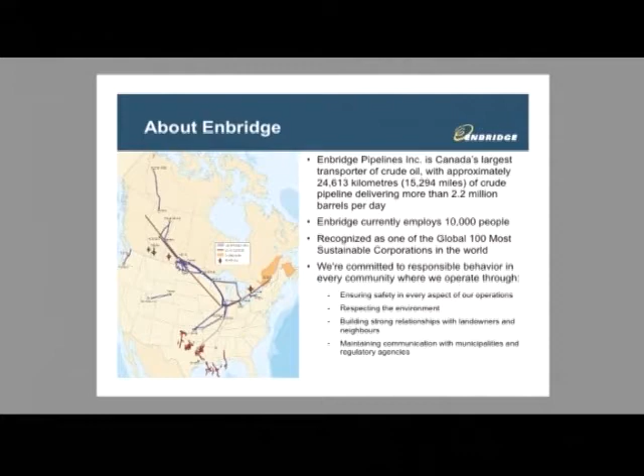We have been recognized as one of the world's most sustainable companies by Corporate Knights. We've had that distinction for several years in a row. We're very proud of it. It's a difficult thing to achieve. We are also committed, and I think this is the most important part of this evening. We are committed to being a responsible corporation in all the communities where we operate. We are committed to the safety of our employees, to the safety of the public, and to protection of the environment. These are critical issues for Enbridge. They are job number one at Enbridge.

Secondly, we are committed to building relationships with the stakeholders who are interested in what we do. So we deal with many levels of government, federal, provincial, municipal. We deal with landowner associations. We deal with individual landowners because our pipeline crosses many privately owned properties. So these relationships are very important. And finally, we believe in transparency. We believe in sharing information. So again, to use this evening as an example, we're very happy to share information about the work that we're proposing to undertake here in Ontario.

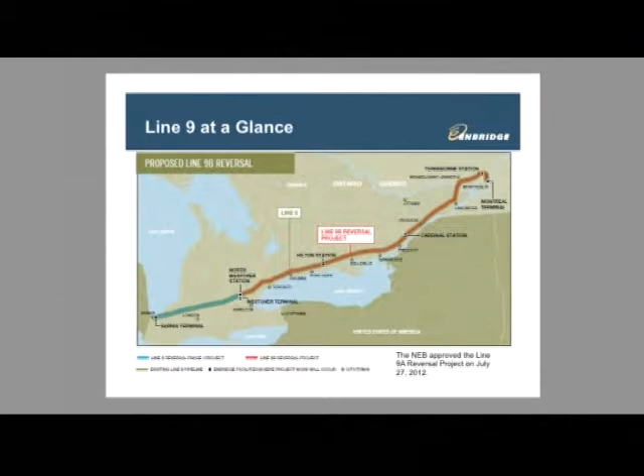There we go. So this perhaps gives you a little bit of a better image of Line 9. And you can see that it extends again from Sarnia to Montreal. And you can see some of the localities, some of the communities through which the pipeline runs. One of the things I will note is that this pipeline, in fact, does run through the City of Toronto and has been in the hydro corridor there for quite some time now. So, thank you.

So a little bit of background about Line 9. I've mentioned it's been around for a while. It's a 30-inch diameter pipeline. It's 831 kilometers long from Sarnia to Montreal. It has an approximate capacity of 240,000 barrels per day. It originally entered into service in 1976. It was actually constructed between 1974 and the end of 1975.

It was built in a west to east flow. So when the line was first put into service, it actually ran from west to east, which is the direction we're now saying to reverse back to. So the comment, a re-reversal, would apply to the pipeline. It was built at the request of the federal government, who was dealing with energy scarcity, some concerns about foreign oil supplies during the decade of the 1970s, the oil embargo, if you will.

In around the mid 1990s, offshore oil production became very affordable because there were many countries in the world who began to export large quantities of oil. Refineries located in eastern Canada, because of their proximity to salt water, realized that they could save money if they were to start buying foreign-sourced oil. So in the 1990s, Enbridge applied to the National Energy Board to reverse the pipeline so that it started to flow from Montreal towards Sarnia.

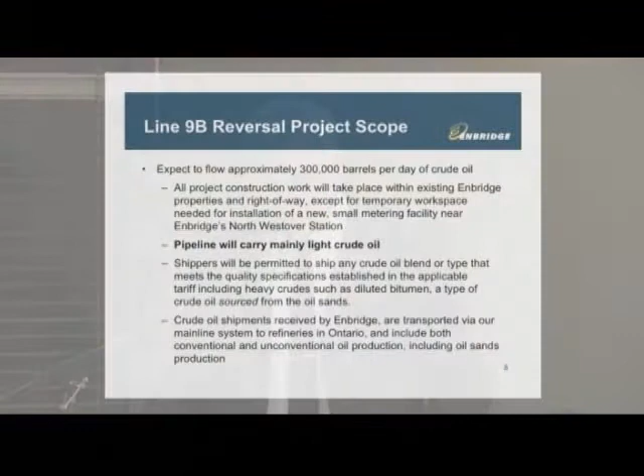The scope of the project. What is it that we're going to do? We are going to increase the flow of this pipeline, which currently sits at 240,000 barrels, to 300,000 barrels per day. Because this is an existing pipeline, it's a pretty straightforward project for Enbridge from an engineering point of view. This is not a complicated process for us to undertake.

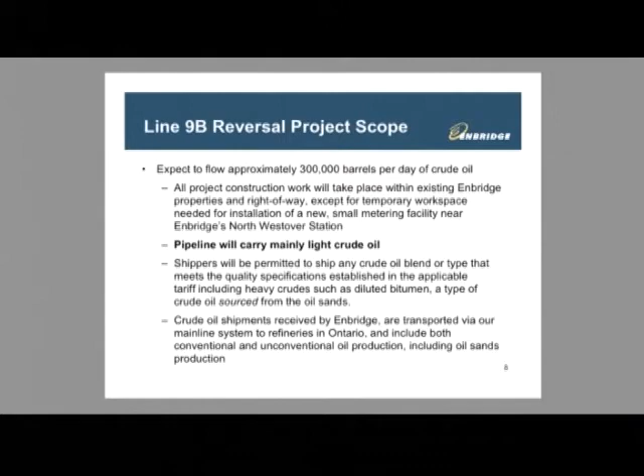All of the work required will take place within our existing facilities. So by that I mean the terminal we have in Sarnia, the terminal facility we have in Westover, the terminal facility we have in Montreal. We also have a series of pump stations along the pipeline which pushes the oil. There will be work that will be undertaken at those facilities too. But we don't need to purchase or acquire any new property. We don't need to expand our footprint in order for this project to be undertaken.

We will be shipping primarily light crude. And this perhaps is something you haven't seen so much in the newspaper. But our customers have requested us to send them light crude, not oil sands-based diluted bitumen, at least not in quantity. They are currently equipped in Eastern Canada to handle light crude. That's what the refineries were designed for. So they've asked us to send them light crude, except this light crude comes from Western Canada as opposed to offshore places such as North Africa and the North Sea and South America and the Middle East.

This is nothing new to Enbridge. We ship a wide variety of crude slates on our pipelines, and we've been doing it across the continent for 60 years. So shipping light, shipping heavy, shipping diluted bitumen is not new. It's something that we have a lot of experience doing.

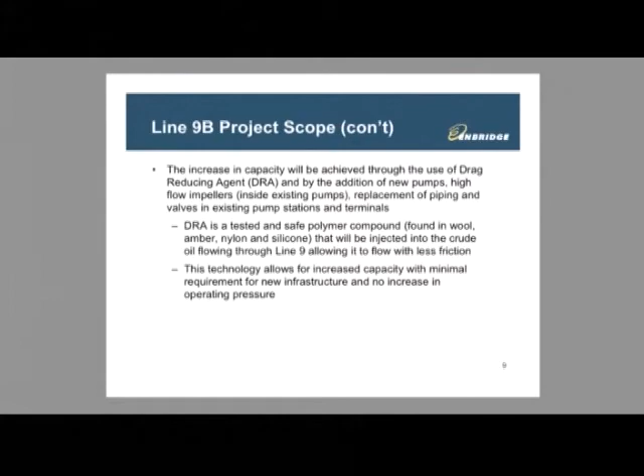How will we get from 240 to 300,000 barrels a day? We will introduce a polymer agent which is referred to as a drag-reducing compound, or DRA, drag-reducing agent. It's basically liquid polymer. We inject it into the pipeline, it coats the inside wall of the pipeline and reduces the friction of the oil as it travels down the pipe. It's hard to imagine that oil, which is slippery by nature, would actually have friction, but it does. And by the introduction of this material, we can actually increase the volume that we can put through the line in a day by 60,000 barrels without having to increase the diameter of the pipe or any pressure operating on the pipeline.

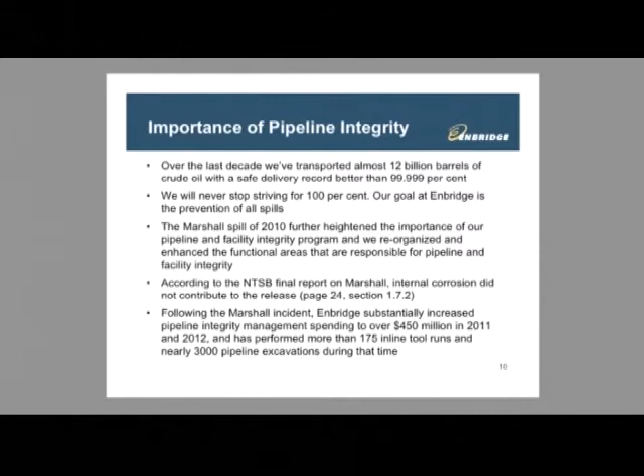Pipeline integrity, security, keeping the product in the pipe. It's important. It's important probably to Enbridge more than anyone else. Over the last decade, we've transported about 12 billion barrels of oil, and we've done that safely. Our performance rate is better than 99.999%. That's pretty good, but it's not perfect.

Enbridge strives to eliminate every spill. No spill is acceptable to Enbridge, and we take that commitment very seriously. We had a spill in Marshall, Michigan in 2010, and it was a serious spill by anybody's definition. We took it very, very heart to heart, and we responded to the best of our ability. We have done a lot since the Marshall incident to ensure that we never have to deal with something like that again. And our team tonight can provide you with many examples of those improvements because they've happened across the board at our company.

We've started with a new emphasis on safety culture, which applies to every employee, new, old, doesn't matter. We've introduced 6 life-saving rules, which are things that Enbridge employees must do. Failure to comply with the 6 life-saving rules means you no longer work for Enbridge. The commitment that the senior executive committee have made to improving our safety performance has really kind of impressed me. Because one of the things, as you'll see in some of my slides, is they have poured resources into these issues.

One of the things of note, again, to address something that's been widely publicized, is the fact that if we were to transport heavier crude oil or diluted bitumen, that material would pose a greater risk to the pipeline because of corrosiveness. Simply put, this isn't true. The Marshall incident was not caused by internal corrosion on our pipeline. It was not caused because of the product that was being transported in the pipeline. And that was borne out by the investigators' report, the National Transportation Safety Board in the United States. And I've cited the page number in their report if you want to see it. It's all available on the web.

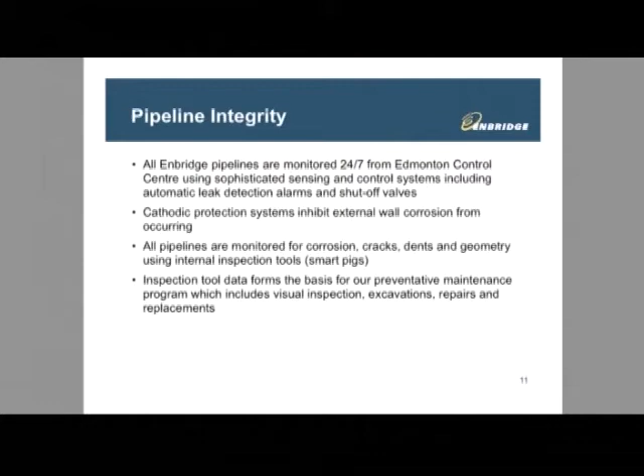All of our pipelines are monitored using the internal inspection tools, which I've mentioned. Those tools look for specific anomalies, or defects, if you will, in the pipeline. They look for corrosion. They look for cracks, dents, geometry issues where the pipe might not be round because of pressure that's been applied to it. The tool data that we collect from the tool runs forms the basis for our integrity management investigative dig program. We find something on our pipeline. The next step is to go to that location, excavate the pipeline, and visually inspect it to see what we're dealing with and determine what kind of repair is required.

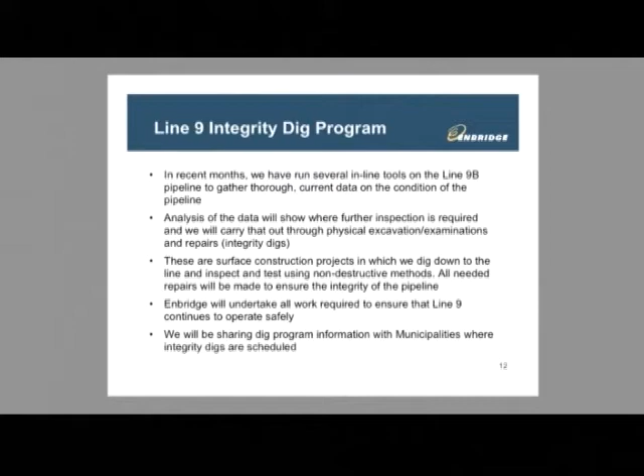This analysis will tell us where we need to go, physically excavate, dig up the line, and conduct repairs, or at least visually check to see if the pipeline tool is accurate. It's found something at the right milepost on our pipe. We go to confirm the tool data, and then we take action to repair, replace sections of the pipeline as required. So these projects are excavation. You'll see heavy equipment on the pipeline route, crews out working, people with shovels, because as you get close to the pipeline, our standards say you have to do your final excavation by hand to ensure you don't hit the pipeline.

All of this work that needs to be done will happen on Line 9B before the reversal goes into service. So before 2014, we're thinking maybe the beginning of the second quarter, all of the work we need to do will be completed.

We will also be taking measures to share this information with the communities that are impacted by it. As I've mentioned, we identify where we need to do a dig. So what we're going to do is we're going to communicate that information to the municipality, to the planning department with the city, to the conservation authority responsible for that property ahead of time, so they know what we're doing as well. They can see where we'll be, hopefully when we'll be there, and we can try to accommodate other people who have interests in those pieces of property.

Certainly when you're dealing with private landowners and you're asking them to allow you to come onto their property to undertake this kind of work, it's very important that you accommodate their interests. Many of them are agriculturalists, as you can imagine.

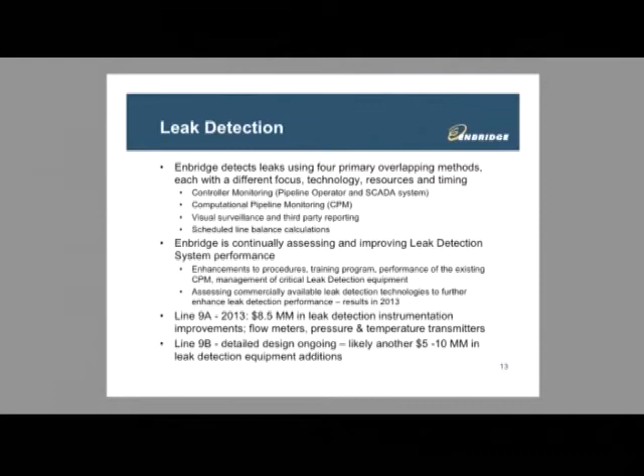We use controller monitoring, which is a pipeline operator and SCADA system. We use computational pipeline monitoring, or CPM. We use visual surveillance and third-party reporting, and we also use scheduled line balance calculations. Now, to me, I'm not quite sure what those terms mean, but I know that they're all intended to determining if, where, and how we might have a leak on our system.

Enbridge is always looking for ways to improve our leak detection system. We've made enhancements to the procedures, to our training programs, to the performance of our CPM, to the management of critical detection equipment. We are assessing commercially available leak technology, new leak detection technologies, to make further improvements to our system. And we're waiting for some results on some fairly exciting new tools that are being developed later this year.

On Line 9A, between Sarnia and Westover, we've spent $8.5 million on leak detection instrumentation, improvements, new flow meters, pressure and temperature transmitters. On Line 9B, there's ongoing detailed design as part of the reversal project that's underway. We plan to spend another $5 to $10 million on leak detection equipment on Line 9B.

The environment. It's critical, and we know that, and we have a responsibility to protect it. And obviously, as you can imagine, the people in Marshall, Michigan in 2010 made that point very clear to us, and we felt for the impact that we had on those people. We took it hard. It was a blow for Enbridge, and we've tried very hard to improve where we found opportunities to do that.

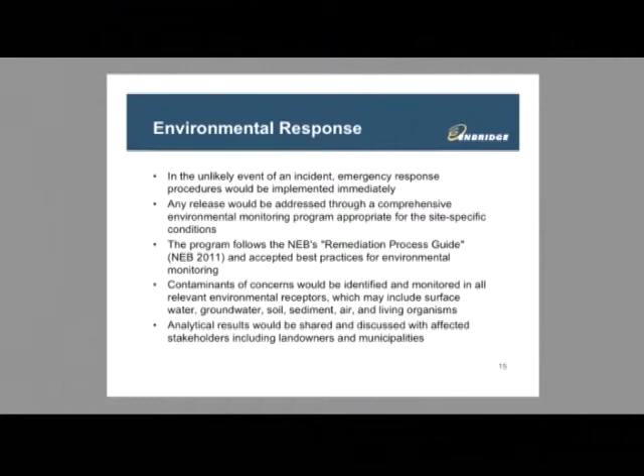The program is also in line with the NEB's Remediation Process Guide, which is their expectation as the regulator of our business on how we would conduct an investigation and an incident response.

Contaminants of concern would be identified. They would be monitored in all relevant environmental receptors: surface water, groundwater, soil, sediment, air, living organisms. All would be studied, all would be taken into account, and everything would be done to protect all of them. The analytical results of this investigation, if we had an incident, would be shared with the community, with stakeholders impacted, and with government.

Again, another dollar sign. $50 million has been spent in 2012 and 2013 on improving our spill response capability, purchasing equipment, training, just overall making tweaks to make our system better so that we're ready to deal with an incident. We're looking at specific programs to build better tools and techniques for worst-case waterborne spills.

Again, to use Marshall as an example, the Kalamazoo River in Michigan was impacted by our spill. We were challenged with new conditions we hadn't encountered regularly before. There were technical things we needed to surmount, and we did. And now we're applying those technologies and those learnings to our entire system.

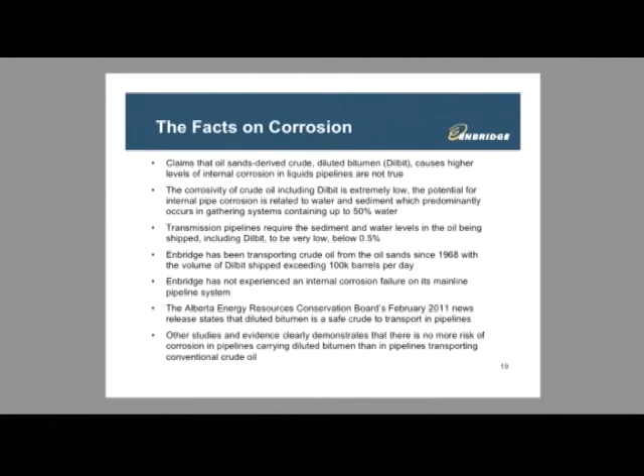We've never experienced an internal corrosion failure on any of our mainline system. And again, I would attribute that to the fact that we have criteria and tariffs that must be met for the oil to be introduced into the pipe.

What do we do to control corrosion? Well, a few things. We test all the crude before it goes into the pipe. We use cleaning pigs, which are internal cleaning tools, to clean the impurities such as sediments that might gather on the bottom of the pipeline, to take out wax that might collect on the wall of the pipeline. Wherever there's an internal corrosion risk, we run these tools.

We add corrosion inhibitors to nullify the corrosive effects of water. We use cathodic protection on the outside of the pipe to protect it from naturally occurring corrosion. And we're still looking for better ways to do things, and that'll never change. We're always looking for better ways, improvements that we can make on our system to make it safer.

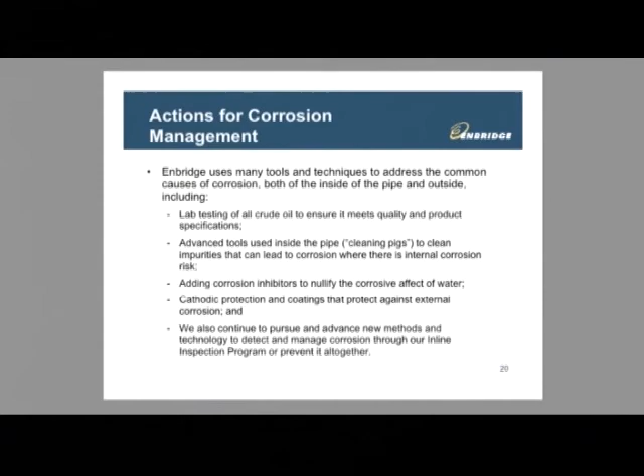Again, a little more information I'll share with you on Marshall, because Marshall has been cited many times in recent newspaper coverage of our project. The event occurred July 26th, I believe, in 2010. Two years later, in 2012, the authorities in Kalamazoo reopened the Kalamazoo River. They reopened it for recreational use. We were very proud that day.

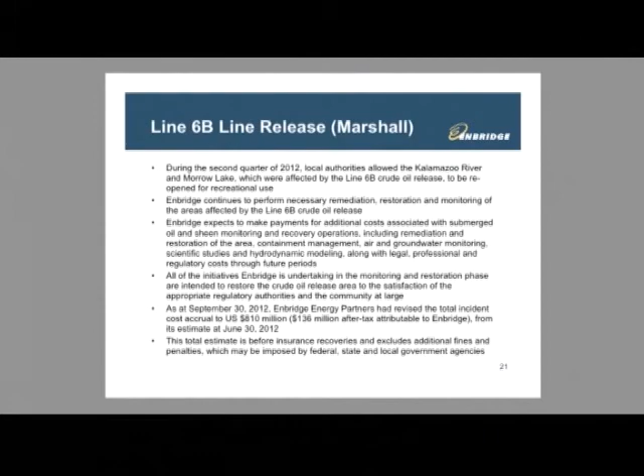Enbridge continues to be on the ground in Marshall. We're still working there. There's still more to be done, more restoration work, monitoring work that will be ongoing for several years. We expect to make payments for additional costs associated with submerged oil and sheen monitoring, recovery operations, containment management, groundwater monitoring, lots of things still going on in that area, as well as legal and professional costs through the next few years for sure.

The point I'd like to make here is what happened in Marshall was unfortunate. It was serious. But Enbridge was there, and Enbridge took responsibility for it. And we're still there, and we're still taking responsibility for it.

And if you were to talk to the mayor of Marshall, I think the mayor of Marshall will tell you that it's a very unfortunate incident. I wish it had never happened. But it did happen, and I'm glad the company involved was Enbridge, because they've been very responsible and they've treated our community very well. It's cost us over $800 million. So it's not small change. It's not something we want to have happen again.

Our control center in Edmonton, lots of changes have been made there. Lots of things have been implemented, learnings from Marshall, improvements to our system. We've changed the way we handle pipeline startups and shutdowns. We've improved and changed the way our leak detection systems work in the control room.

We've enhanced our communication protocols, and we've created new systems, if you will, new procedures to deal with suspected column separations, which is what was involved in the Marshall incident as well. We've enhanced the organizational structure for better support of our operators to manage the span of control and the workload.

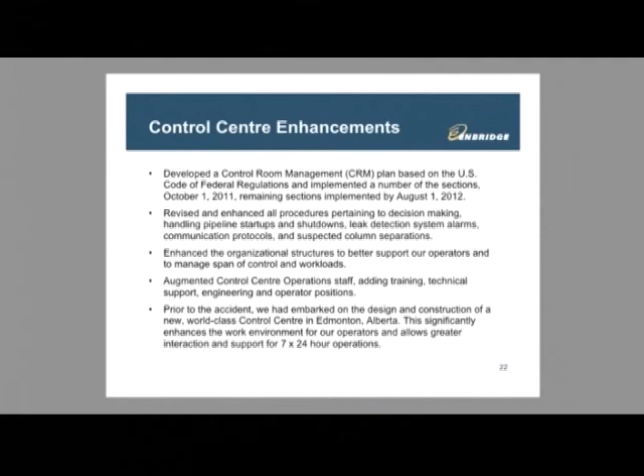I'm not quite sure what kind of work you all do, but a control room, 24 hours, 7 days a week, sometimes it's monotonous. There are challenges to working in that environment. Enbridge is looking at new ways to make that work environment more pleasant for our employees, because that's important. It also impacts their performance. We've augmented our staff, we've added more training, more engineering, and we've just increased the number of people.

Prior to the Marshall incident, we'd already started a project to actually build a new control center, which has now been completed and is open. It's in Edmonton. And it's a new approach to this 24-hour around-the-clock working environment, designed to be more ergonomic, more comfortable for the people working there.

Ken, respectfully, I know you have a few more slides. If I could ask you to get through them in about 5 minutes or so, because I want to maximize the time available for the group to ask questions. Thank you. I got 5 left, folks. Great. I hope nobody's falling asleep. And I can go through this quickly.

Stakeholder consultation on this project. We've met with the government at all levels in the province of Ontario and the province of Quebec. We're meeting with MPPs, elected officials at the municipal level across the pipeline route. We've had engagement and dialogue with 14 First Nations. We've sent notification and description letters on the project to 2,645 landowners and 110 municipalities.

We conducted 5 public open houses in Ontario and 2 of them in Quebec to date. We've also created a project-specific website and an email service for any stakeholder or any citizen to ask us questions. There's lots of information on that website. I encourage you to look at it if you haven't already.

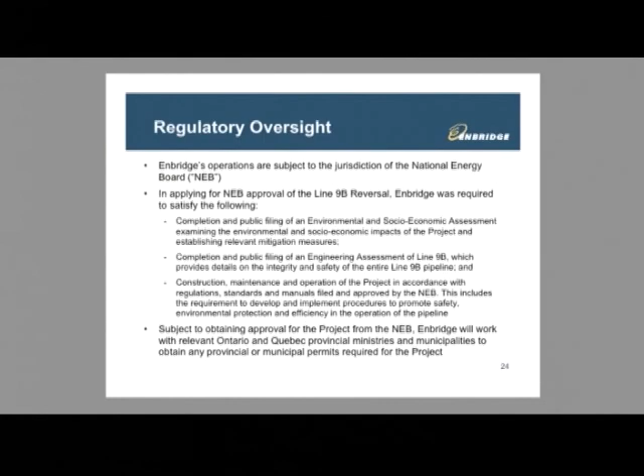The first one was an environmental and a socioeconomic assessment, which looked at the environmental impact and the socioeconomic impact of the project. The second was an engineering assessment, which looked at the condition of the pipeline. Very important part of our application. And the third is we had to show evidence and procedures on how we were going to meet all of the operations and construction standards that the NEB has. So those 3 pieces form the basis of the application.

Move my slide. Sorry, thank you.

Subject to obtaining a permit from the NEB, at that point, Enbridge would then enter into a dialogue with all of the other agencies that have a right and a permitting process on this project. So the province, the municipalities, the conservation authorities, all would be involved.

In summary then, this project will protect the viability of Ontario and Quebec refiners and open a new market for Western Canadian producers. Pipeline integrity, the safety of the public, the safety of the environment are our #1 priorities, and they always will be. All the work we need to do will happen on our facilities within existing easements. No new property is required, except for a small piece of temporary laydown workspace near Westover. We've already talked to the landowner, and he's happy to have us use his property for a couple of months.